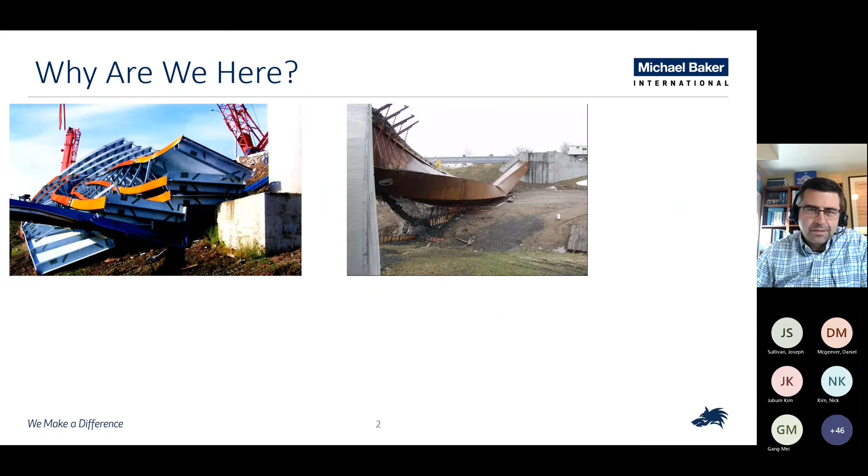One shown here - this was in Illinois. This one was up in New York State, a tub girder bridge while the deck was being poured. I'm not exactly sure where this one is, but it's not just a steel issue - it can also be a pre-stressed concrete issue if certain things aren't taken into account during construction. Those three photos are occurrences during construction where, unfortunately, in a couple of cases somebody lost their life. Obviously the superstructure was lost in that case too, and obviously these are all things we don't want to deal with. This last one, down on the right, is a collapse that occurred during demolition, which can also be a critical stage during the bridge's service life - taking a bridge out of service and removing pieces and parts of the bridge.

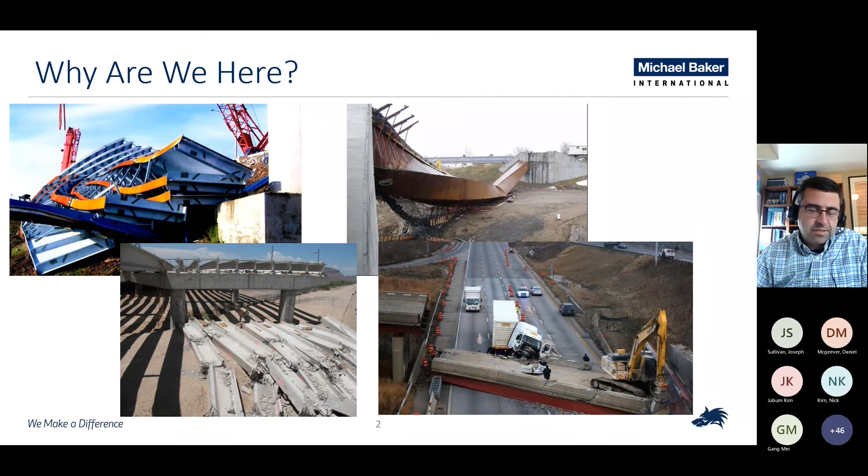These issues occur - not frequently, but every now and then. As engineers, typically we design the structure, put it on plans, and ship it off. It gets bid and built, right? But what goes into building that bridge? What are some things that, as design engineers, we need to be cognizant of as we review erection plans, erection calculations, contractor submittals, and things along those lines? So the goal here today is to run through this outline. I'm going to share some references and guidelines, and we'll talk about some critical stages of bridge construction.

Obviously, the bridge during construction is not the same bridge that we have as final design. In many cases, there's stability concerns during steel or pre-stressed concrete erection, during girder erection, that contractor engineers need to understand and take into account. Wind loading is a lot different from a structure that's not complete versus one that is.

Various non-composite conditions that occur, constructability, deck pours, things like that. We'll talk a little about stability considerations, going back to what the critical stages are and how we can investigate those as a construction engineer, or maybe what we should be looking for. And then also talk about what probably needs to show up on erection plans, procedures and calculations. Not every bridge fits into this. Some of your simple, maybe single span or short span bridges don't all fit into all of this. Some of them are a little easier to erect than others. Then we'll summarize everything up, and I'll touch on bridge demolition a little bit as well.

I think what I want to do is first start with some references and guidelines that are out there. I've been lucky enough to both be a part of the development of some of these, but also work as an engineer developing steel erection sequences and construction sequences for contractors. So I've got professional experience in that background, but also some experience helping in the development or review of some of these guidelines.

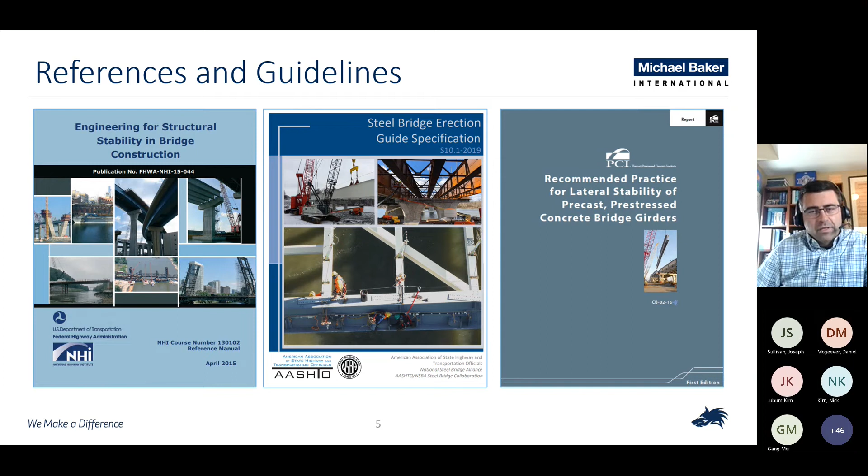The nice thing about all these documents is they're free. I think you might have to pay for the PCI one if you want a hard copy, unless you're a member, but the PDF is free, so you can join and download that. The other ones are free too. Again, the FHWA website, the AASHTO NSBA one is available at the NSBA website, and the PCI one is available at the PCI website. All really good references when dealing with construction engineering for all these bridge types.

I'm going to put a plug in here for this National Highway Institute course, the 130102, Engineering for Structural Stability in Bridge Construction. It's a 2.5-day course. You can find out more at the NHI website. Anybody can host it. Typically DOTs will host it and then allow some consultants to attend, but it's not out of the realm of having a consultant host it and having some of their friends come too. There is a cost associated with it, of course, and your own labor cost as well, but if you're involved in construction engineering, this is a must.

What you're going to see here today in the slides I share a little bit later are a few very quick excerpts from the course, just to kind of wet your whistle with regard to what's in the course, and then some other things from my personal experiences over time as well.

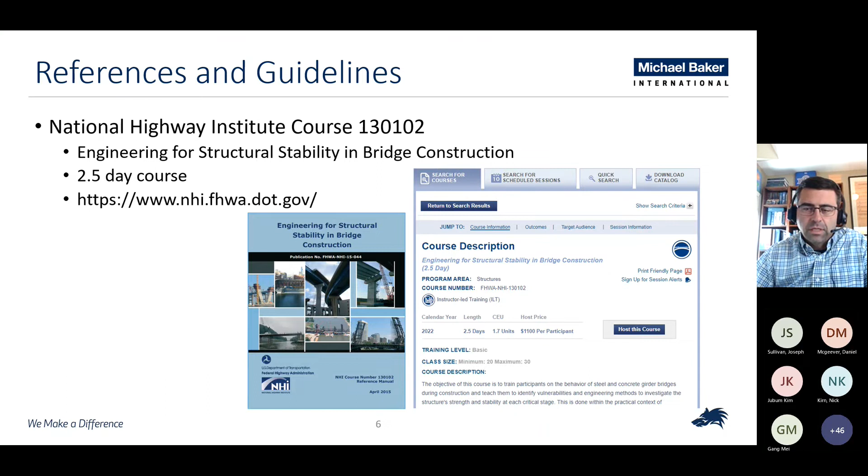So just keep that in mind. This is the 30,000 foot flyover of all of this. There's definitely a lot more that goes into the construction engineering for girder bridges. So let's just walk through some critical stages of bridge construction.

This is just a typical two-span bridge. This one's going to be steel, but it could be concrete as well. Obviously a little bit different if it's a pre-stressed bridge. But let's just walk through what occurs on a construction project like this, just a girder bridge.

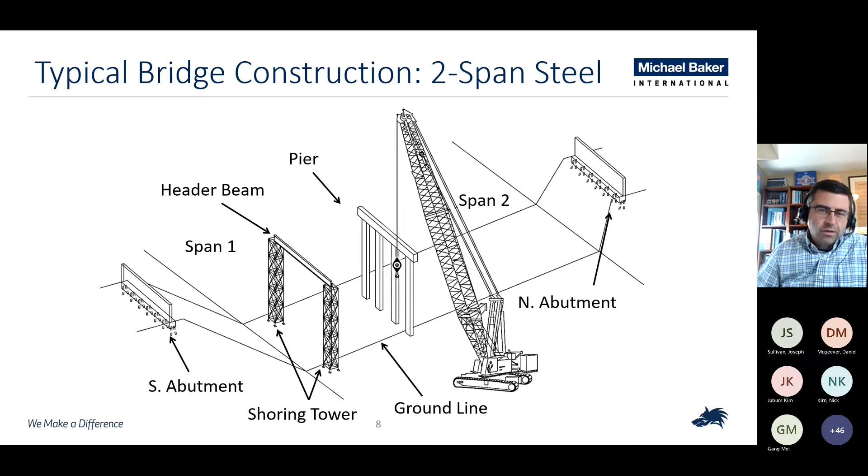We're going to have a two-span bridge. We're going to have the pier constructed, the abutments constructed, some kind of shoring tower in the middle, a lifting crane, the big crane shown there. And we'll go ahead and place that first girder.

Now there's some considerations that need to be taken into account with that first girder. If I just put it down without any bracing, if a little bit of wind comes, it's just going to blow the thing over, right? So we at least have to have some type of lateral bracing, temporary stability brace at the supports. You can see that identified there at the shoring tower, but then also back at the abutment as well.

What else do we need to worry about? Well, this is a very long unbraced length, right? So we have issues with lateral torsional buckling capacity. During construction, we often have long unbraced lengths that need to be considered.

But another component is also wind. I can't just put that girder down and hope for the best, right? There's going to be some kind of wind load that needs to be taken into account. Is it a 70-mile-an-hour wind? Is it a 30-mile-an-hour wind? Can the contractor only work when the winds are less than 20 miles an hour? Those are things we look at as a construction engineer.

An engineer working for a contractor will say there may be certain limitations with regard to that wind load when they can place girders, and that all needs to be considered and thought of by the engineer working for the contractor. So we'll move on.

We'll go ahead and put our second girder down. This particular one has cross frames on girder 2 on both sides. That'll often occur - they'll lift the second girder in with several of the cross frames attached. In some cases, it may be all the cross frames. In some cases, the contractor may choose, for the sake of speed and time, to not put in all the cross frames.

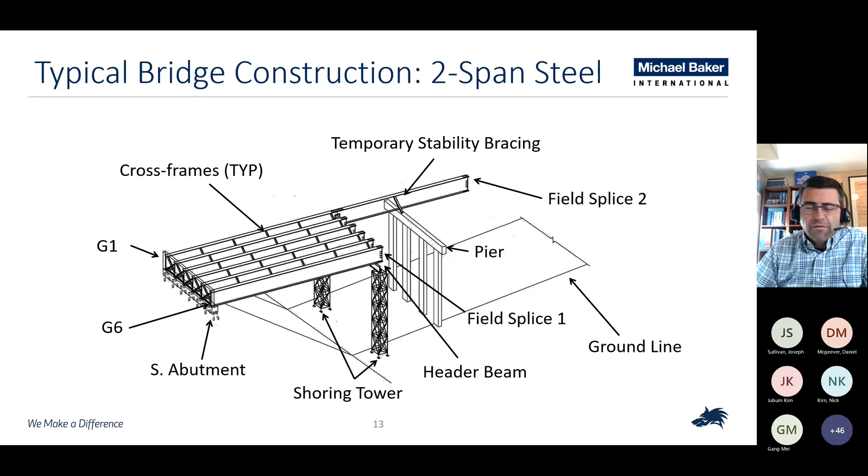Is it deflected downward too much where I won't be able to make the next field splice? Often it'll be okay for stability purposes, for stresses and things like that, but deflection control and consideration of deflection is always something to consider as well during erection, steel erection.

Then again, marching across the bridge, working our way across, erect all those girders, maybe all the cross frames, maybe not all the cross frames. This particular detail or sketch here shows all of the cross frames. So things to consider there again.

Again, we have to think about wind. It's not a completed structure, right? The wind is really blowing on one span with a little bit of a cantilever. So there's things to consider with regard to that.

One thing I'll mention here is often what I would see is some calculations show that all your wind is blowing laterally on the bridge. It's really just a collection of the IYs of the girders that are resisting that. Because you don't have any lateral bracing, top flange or bottom flange, there's really no AD squared term with regard to the stiffness of the whole entire cross section. So you're really just relying on the sum of the IYs to resist that wind load. Just keep that in mind when you're doing analyses for these, or you're checking these, or looking over some erection calculations, that it's really just the IYs.

Unless you have lateral bracing, then that changes the game a little bit. But we have to consider wind here, and it's not just necessarily for strength purposes, but also deflection purposes. We're going to have people out there working on the bridge. They may be setting rebar, perhaps, and if the bridge is deflecting 4 or 5 feet in one direction, which it can do if it's not stiff enough, we could have some issues with that. Some comfortability issues, as we'll say.

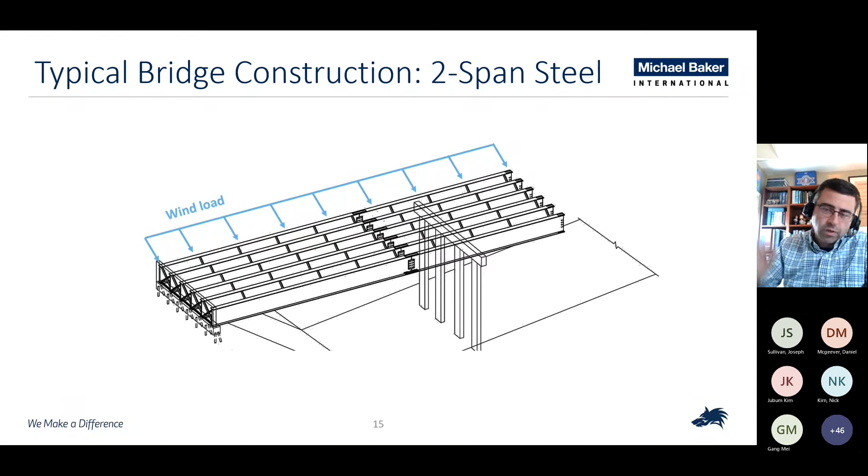We removed the shoring tower. I should go back here. Typically, you'll see that the shoring tower would get removed after those, when we're at this stage, actually. That is so that the field splice tips at the end there, they actually deflect upward, which makes the construction and the connection of this next piece much easier.

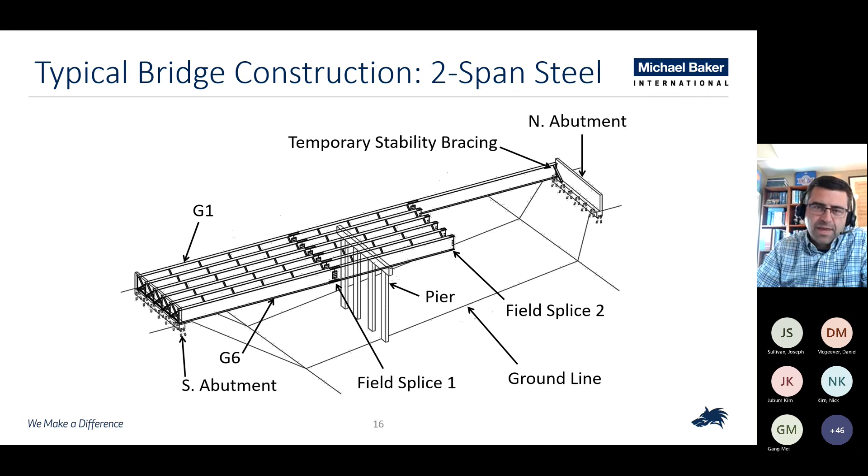You can think about bringing that girder piece in and connecting it to something that's pointed up as opposed to connected to something pointed down, especially when trying to set it on the north abutment. So often you'll see that shoring tower get removed once the span is done to kick those field splice locations upward.

And again, one thing we obviously have to consider here is again the wind loading on the completed steel framing. And again, like I said, it's a collection of the IYs, a summation of the IYs that are generally resisting that lateral deflection. And what can my bearings take? We always design for the final composite condition, but in some cases, again, the non-composite condition can control.

And maybe again, not so much for strength, but serviceability during construction, and the amount that those girders may move for wind load applications is something we do want to consider, and maybe not necessarily neglect when we're designing this. As a design engineer, we might want to look at wind on the completed steel superstructure just to make sure we feel good about it, and we're not going to have major fluctuations and deflections and things like that.

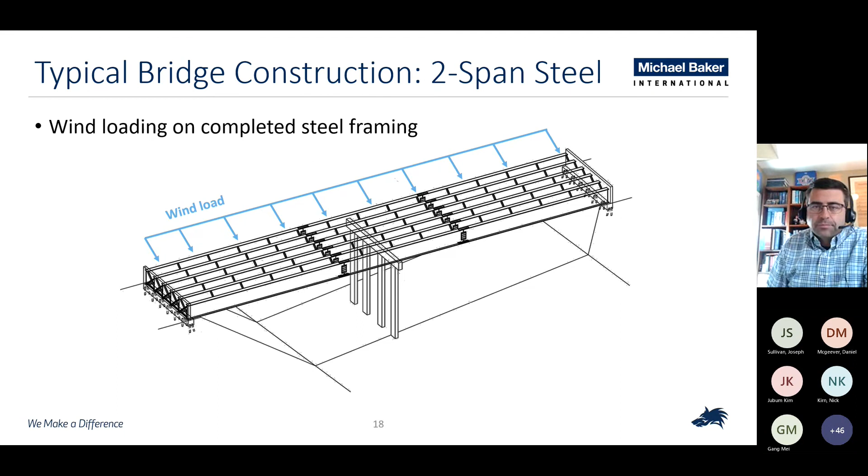Of course, once all the steel is up, my focus is going to be on steel for a lot of this. Once all the steel is up, we have to place the concrete deck, and there are certain things we need to consider. Generally these get considered as part of our constructability checks that we do as a designer, but the contractor often goes through these as well, just to get a better feel and make sure they're good with the deck pour sequence shown on the plans. As the contractor's engineer, sometimes I may have to look at this and make sure everything's good.

You could think about this: we're loading a lot of wet concrete on the bridge in the non-composite condition. So that changes the game a little bit. We've got this pretty heavy load, the concrete deck, going on just plain bare steel, and there are certain considerations for that. We're in a non-composite condition, and again we're concerned, in most cases, about the top flange in compression. Is that going to survive? Is it going to pass the lateral torsional buckling capacity checks, the lateral torsional buckling resistance checks we have in the AASHTO LRFD?

There's a whole section on constructability, and it really has to do with the deck pour. Loading the bridge in pieces and parts like this, with regard to the deck and the various staging, is often the most critical condition with regard to constructability. You really have to take a look at that deck pour sequence and make sure the girders will survive it, will pass muster, because the loading in this particular condition is quite different from just assuming a monolithic pour and putting all the self weight of the wet concrete on at once. So it's pretty important we look at the deck pour sequence, especially for longer span composite steel girder bridges.

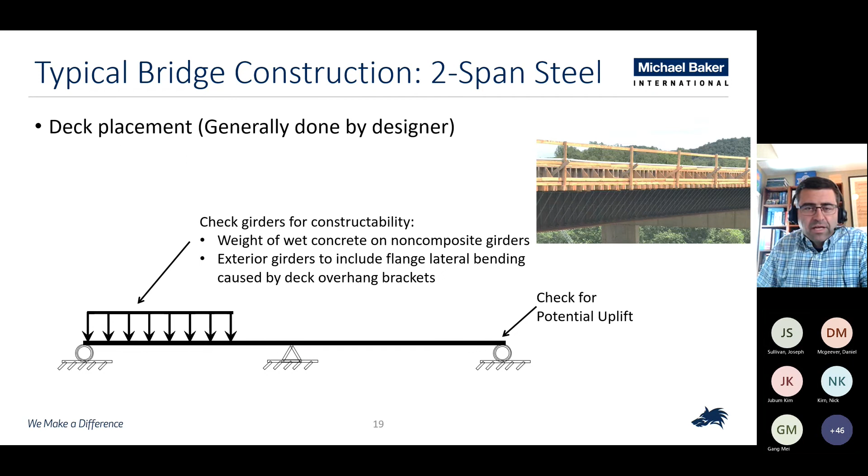In addition, for our exterior girders, we have to consider the flange lateral bending effects caused by the deck overhang brackets, and AASHTO LRFD addresses this as well. Those overhang brackets, as shown in the picture, we can make them out sitting on the exterior girder. We have to check those forces that get applied to the girder. We're going to have those overhang brackets spaced every 3 feet, maybe in some cases 4 feet. In some states, that overhang bracket also supports the Bidwell machine, or the screed, that places the deck.

We have the weight of the wet concrete out there on the overhang, the weight of the formwork, the weight of people out there, and of course the screed rail, if you're in one of the states that puts the screed rail out at the edge of the deck. All these play into the loading on that flange. And because that top flange is in compression, we have a lateral bending stress that gets added to it, with the one-third rule that's in the AASHTO LRFD. So it can add up.

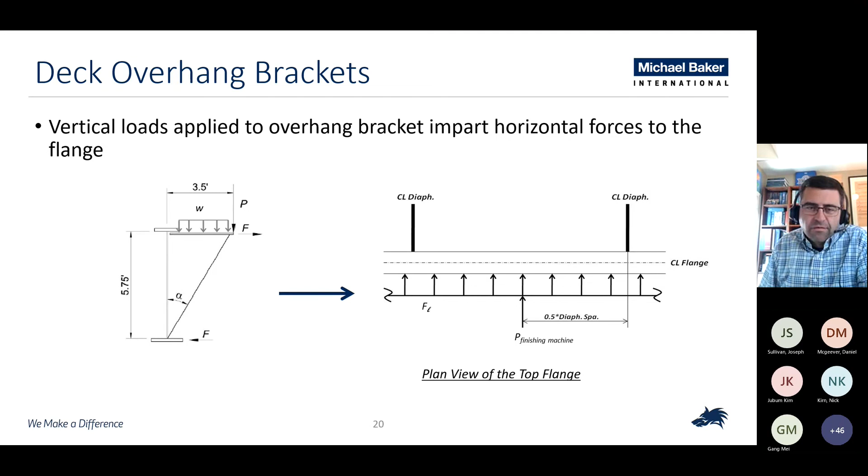Of course, narrow flanges are typically not good for this. Real small flanges, and typically in the positive moment region, we do have smaller flanges. If you get down real narrow, hey, it works great for strength. You may find it may not work so well for the constructability check. So just something to keep in mind going forward.

All of that I discussed before, we have all of that's in the non-composite conditions, right? So it's vastly different from when we just plug into our program that we might want to use and say, all right, run the live load on it. Let's see what happens. We always need to take that step back. If your particular program you're not using doesn't look at constructability, you really need to look at some checks outside of that program if you're using a program to design your girders for that. So just keep all of that in mind, the importance of looking at the deck pour sequence with that.

So let's talk about some stability considerations. In the previous couple slides, I talked about some conditions where we have concerns with unbraced lengths, typically for single girder stability of steel girders, two girder stability of steel girders, and then we'll talk a little bit about the pre-stressed concrete side and some things that we need to consider there as well. We could have similar issues, not necessarily with regard to lateral torsional buckling, but with regard to roll stability and lifting stability of those types of members.

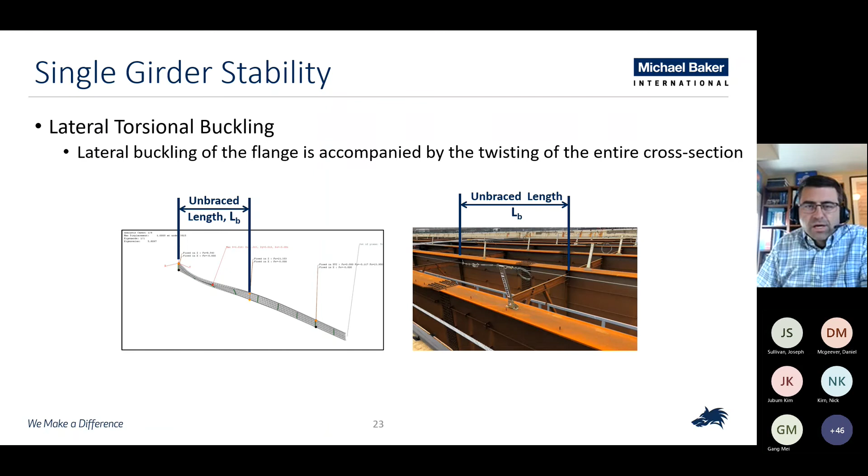So yeah, those are the concerns with regard to single girder. So what do we typically do? We're concerned about the lateral torsional buckling resistance of the girder. If you're familiar with the AASHTO LRFD, there's a nice section there on lateral torsional buckling, section 6.10.8.2.3, and we have three equations there.

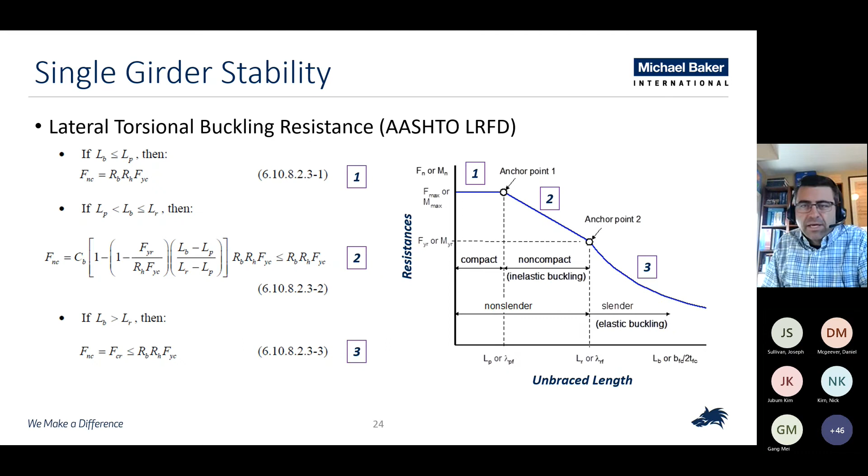So say I do have these long unbrace lengths. What can I do to make my girder work? I'm stuck at 125 feet or 100 feet. We can't put - we have to erect this first girder and that's that, right?

So maybe I use a hold crane to reduce the bending moment of the girder. Maybe I have a smaller crane on site that the contractor determines they're going to have there, and I'm going to hold the crane at midspan. I'm going to reduce the moment, right? Instead of a nice, big moment diagram, I'm going to put a point right in the middle and pull the girder up a little bit, so my moments are significantly reduced.

The big thing there: the hold crane cannot be considered a brace point. That's something to keep in mind. There's not enough lateral stiffness typically with that crane holding it there that you can consider that a brace point. So it's probably a wise decision to not consider it a brace point.

Second thing you could do is provide a brace point at the midspan, maybe with some tie downs. Maybe you've seen this before - cables wrapped around the girder down to a concrete deadman or a big concrete block on the ground, both directions on both flanges, just to brace the girder. Those would be attached before the lifting crane releases the girder. That would provide - you'd have to do some design calculations - but assuming your calculations are correct, that could be used to provide a brace point at the midspan and reduce your unbrace length, cut it in half. Or maybe you can just provide more temporary support, a different shoring tower arrangement, and then put that lateral brace down to that shoring tower.

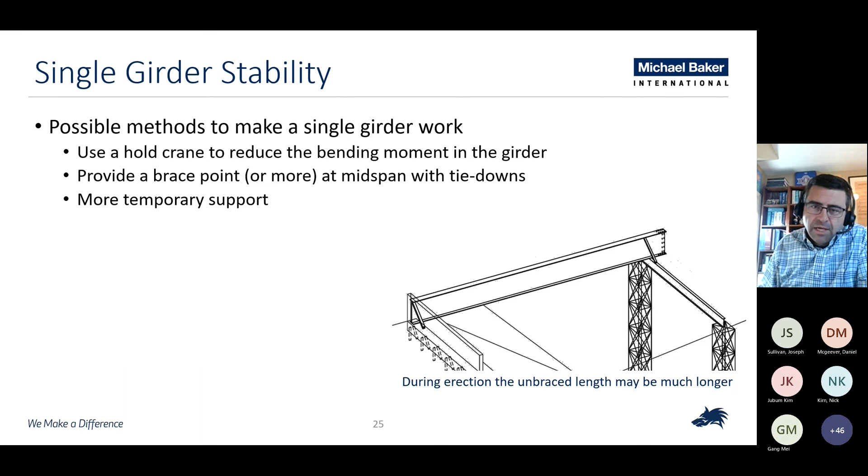Again, long unbrace lengths affect the lateral-torsional buckling resistance. Don't just walk away once you get the second girder up - you've got to check that. Maybe you're only going to have one cross frame at midspan; you need to make sure that works in this particular case as well. Maybe the contractor wants to come in and just put in one cross frame initially and then come back and put all the rest later. So you have to look for these long unbrace lengths, not just for vertical load, self weight, but some considerations with regard to wind as well.

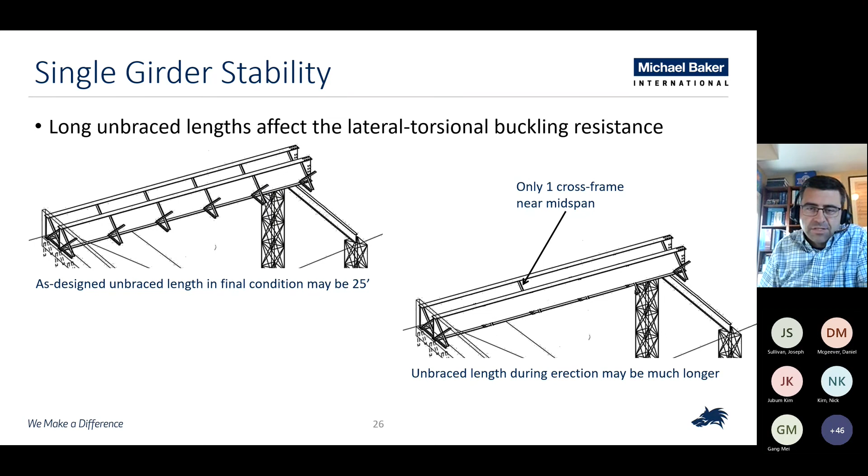So let's move on to two girder stability. There are some conditions where you do have two girders erected, like in that previous slide, where I might have some issues with regard to stability of narrow units. The designer typically uses the unbrace length LB for girder buckling - that's the distance between cross frames. But we've seen girder systems as a whole, a long and narrow girder system, so a long length to width ratio, become susceptible to a system mode of buckling or a global stability mode of buckling.

In this particular case, you could put all the cross frames in you want, and they're really not going to affect the behavior of the bridge in the system mode of buckling.

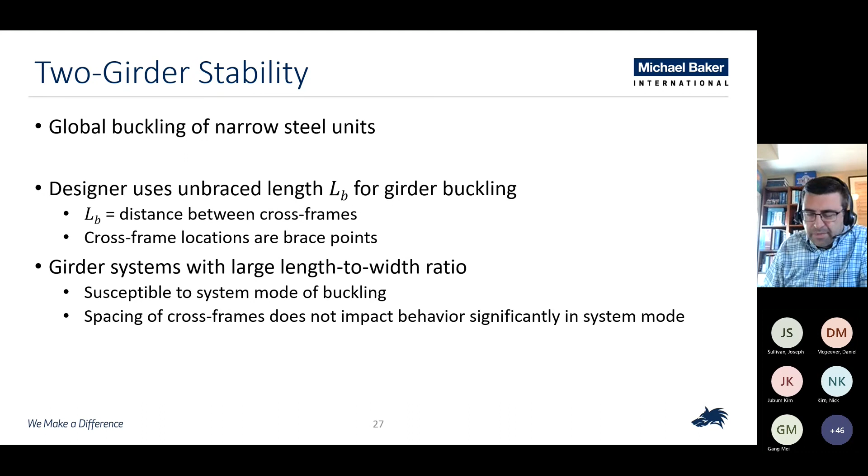This really came to light in 2002, and I shared this picture before. This is the Marcy, New York pedestrian bridge. It consisted of a single box girder with no top lateral truss system, so no lateral bracing in the plane of the top flanges. The girder did have internal K-frames spaced a little more closely than normal.

But research from the University of Texas at Austin, by Joe Yura and Todd Helwig, looked at this pretty extensively over time. What they found is that this particular girder really behaves similar to a twin I-girder system with no lateral bracing in between. It really started some concerns with regard to structures like this.

What occurred here in the Marcy Bridge is they got the steel up, no problem, got the rebar laid down for the deck, and started pouring the deck. Once they started pouring and got maybe a third of the way out, the girder twisted globally and unfortunately fell down. I believe at least one of the workers died on the job there.

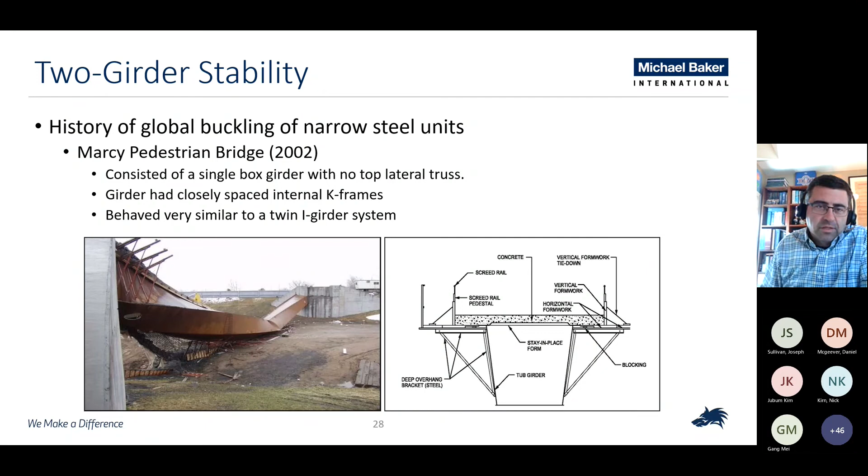So what was found is the cross section wasn't offering enough global stability at the end of the day. A lot of investigation went into this.

You can think about this for a two girder system, your LB, your unbraced length between cross frames, versus LG, basically the length of the global system. You have buckling in two different modes here: one is lateral torsional buckling between the cross frames, and the other is global buckling for the entire bridge.

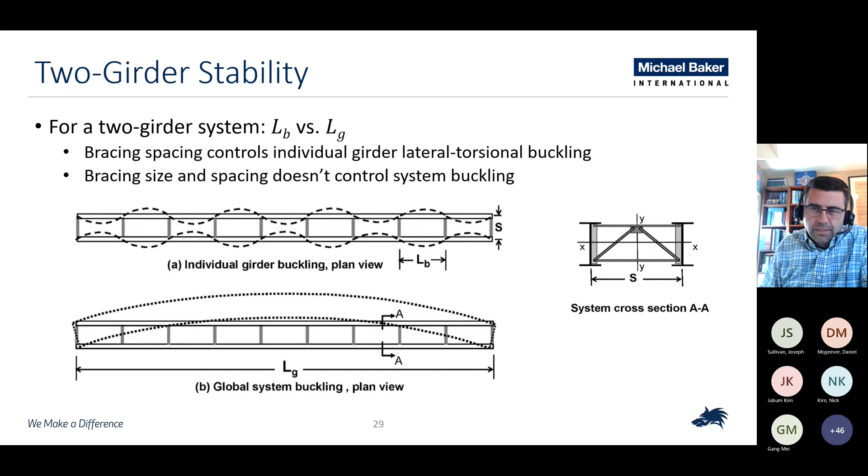Some studies done at UT Austin put the same bridge in there with the same girders and the same cross frames. You can see on the left, the global buckling critical moment is roughly 800 kip-foot. On the right, the buckling between cross frames is close to 1400 kip-foot. So almost half.

So something to consider if you have a two girder system, a long two girder system that you're putting a deck on for some reason, maybe even some three girder systems as well.

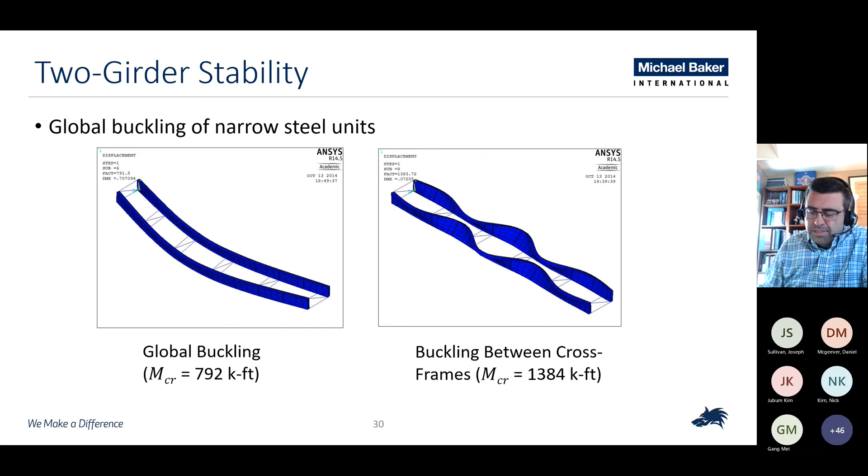This gets talked about in the AASHTO LRFD equation 6.10.3.4.2-1. This whole section talks about the global buckling of narrow systems, and a lot of this equation was developed through the research work based on the Marcy Bridge collapse at UT Austin.

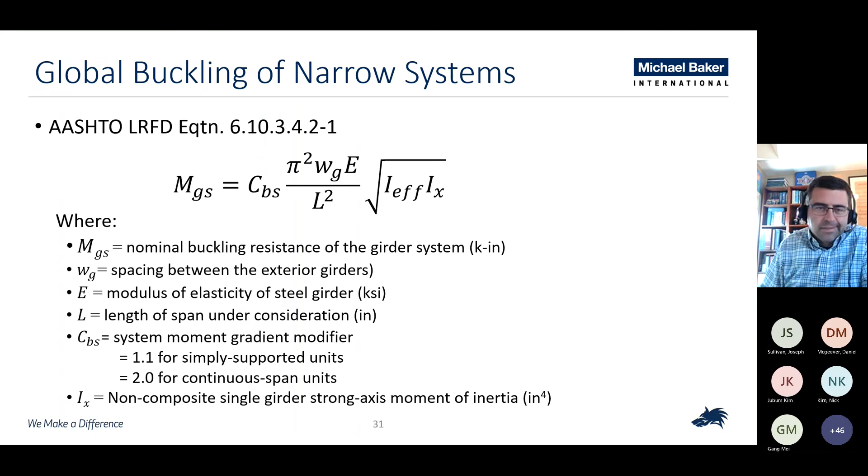I'm not going to run through all the things here, but it's just some general parameters you can easily come up with based on your girder design and cross section design. You can see CBS there is either 1.1 or 2.0, depending on whether you're simply supported or continuous spans. I effective really comes down to your effective IY basically at the end of the day—you've got your IY on the compression flange and your IY on the tension flange, and that's really a combination of those two, and just where the centroid lies within the girder.

There's a statement in there for non-prismatic girder properties. AASHTO recommends doing some kind of weighted average for IX and I effective, so you're not looking at each individual location along the girder—you make some engineering judgments with regard to that. A weighted average is fine. A lot of this is already approximate, so being a little more approximate is not going to change anything.

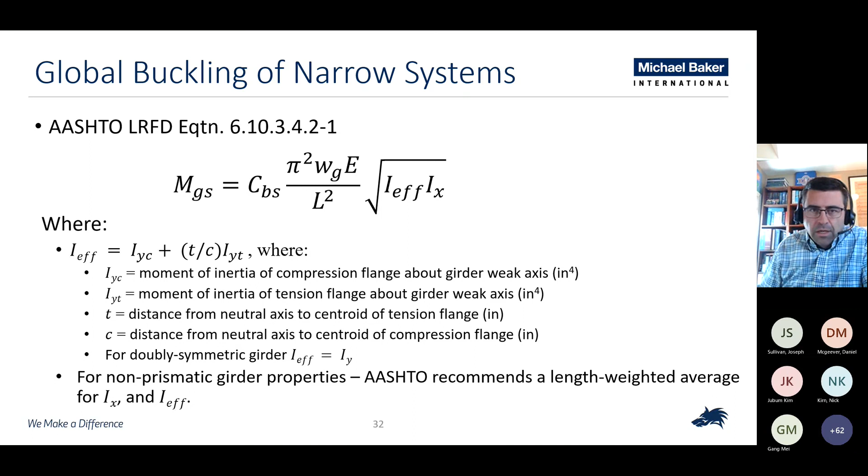So you calculate that global stability moment, and really what AASHTO says to do is you're considering all the girders across the width of the unit and the span. You're going to take your total factored moment for the deck placement, and it shouldn't exceed 70% of that MGS, the global stability moment.

And really that's a big thing for pouring decks on long narrow systems—big length to width ratios. Think a long 200, maybe 300 foot span that maybe only has 4 or 5 girders. This really starts to play a role regardless of how many girders you have in the cross section.

So what happens if you don't meet that? What happens if your moment for your deck pour is greater than 70% of the MGS? Well, you may want to start considering adding flange level lateral bracing, typically in the top flange, or you could try to revise the unit system stiffness.

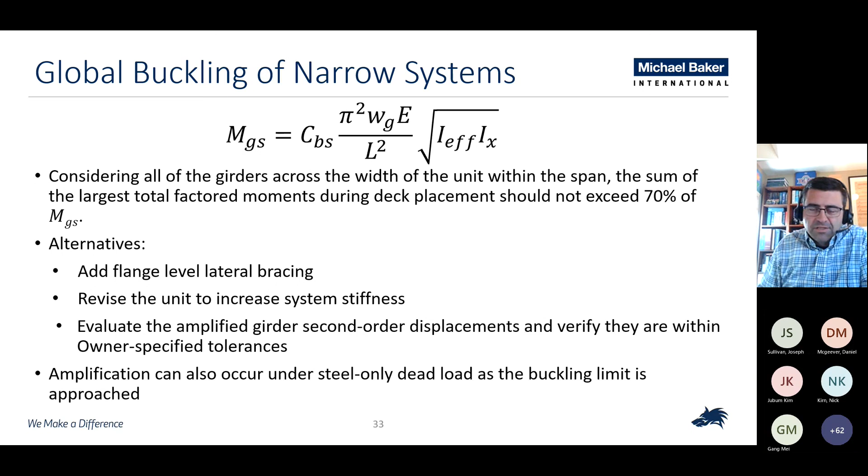Maybe you do a higher end analysis and look at the amplified girder second order displacements and verify they're within some tolerance. You can look at the buckling, do an eigenvalue buckling analysis and get into all that. But generally, this equation is going to serve you well in those types of conditions.

So just an example here. Don't necessarily get caught up in the numbers, but really want to show here's this two girder unit. We have a simple span, a length of 180 feet, and we're going to do a couple different things here with it.

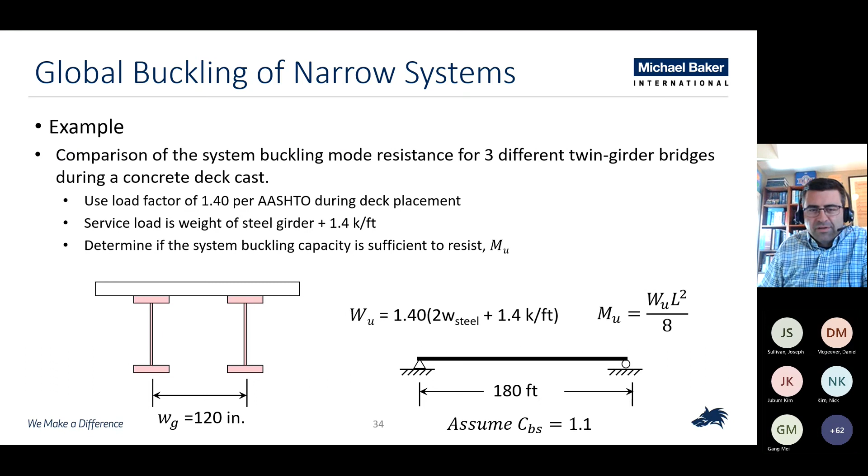Again, we're going to look at bridge 1 and 2. They have no lateral bracing, 180 feet. Bridge 3 has some lateral bracing just in the last 2 bays on each side. So our effective LG in that case is only 1,200 inches as opposed to 2,160 inches, and everything's converted to inches here. So you can think of it as we've narrowed down that global unbraced length, or that global length with regard to stability that we're concerned about.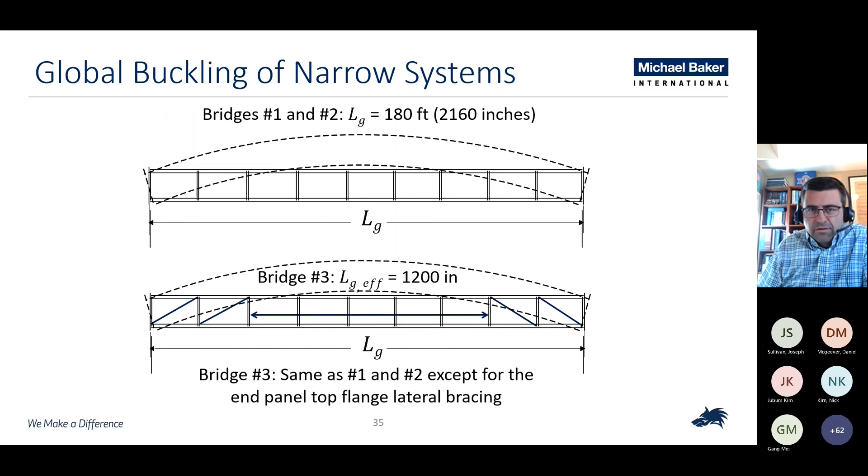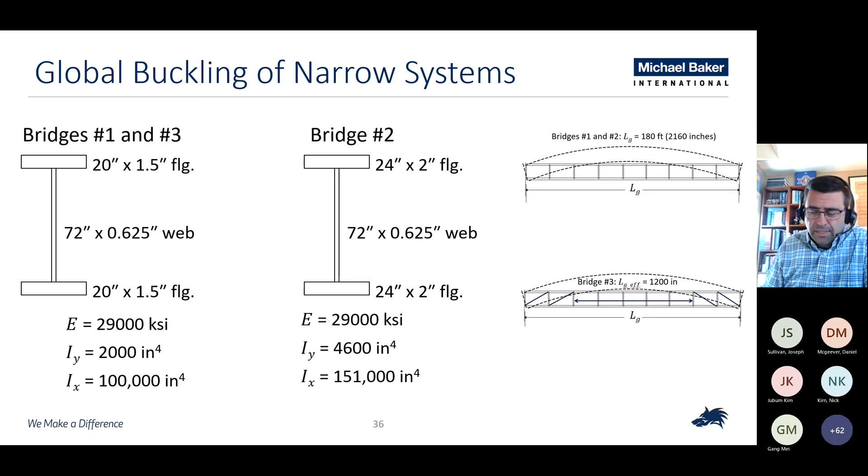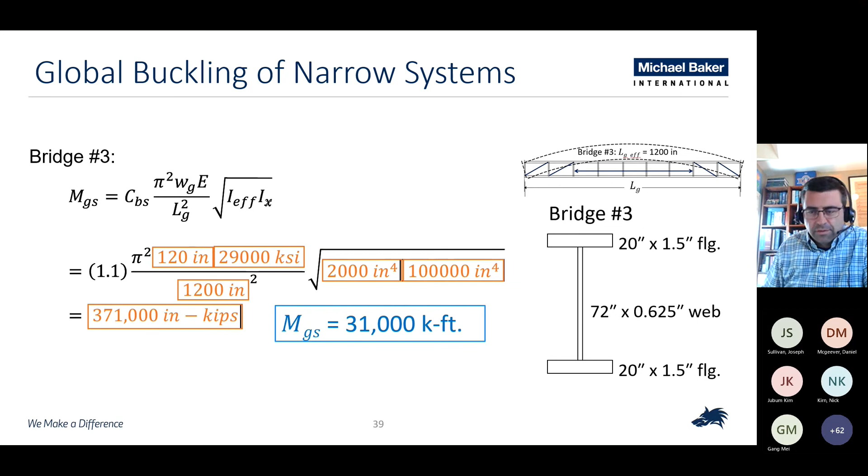So you could run through these calculations. I'm not going to run through them all here, it's math, it's kind of plugging things in. But you can walk through bridge 1, we get an MGS of about 10,000 kip foot. Bridge 2, I'm going to have a slide that compares all these in a second, 17,000. Bridge 3, where we have that shorter effective length for global stability, we're up to 31,000. So let's put all these on one slide and multiply them by 0.7.

So you can see, bridge 1, again I have that one girder section, the same girder section as bridge 3, I have roughly 7,000 kip foot, and we had a global moment of 8,600 kip foot. Does it pass? No. That's the MU there. Well, really what I want you to focus on is how the capacity or the resistance changes in this particular case.

So bridge 1, again, no lateral bracing, the smaller flanges. So let's say we go from bridge 1 to bridge 2, same framing plan. We made the stiffness a little bit bigger, we made our IY more than double, we increased our IX by 50%, but not a whole lot of gain on the capacity or on the resistance for global stability. We went from 7,000 to 12,000. Some gain, it does work, but we got a pretty big section there. Maybe we can't get that section to work for some other reason.

Bridge 3, compare that to bridge 1. There we just added in some top flange lateral bracing in the two end bays. You can see the gain we got in our global stability moment, we're up to 21,000 as opposed to 7,000. So throwing in a little bit of lateral bracing, just in the end bays, the two end bays on each side, helps tremendously with regard to that global stability.

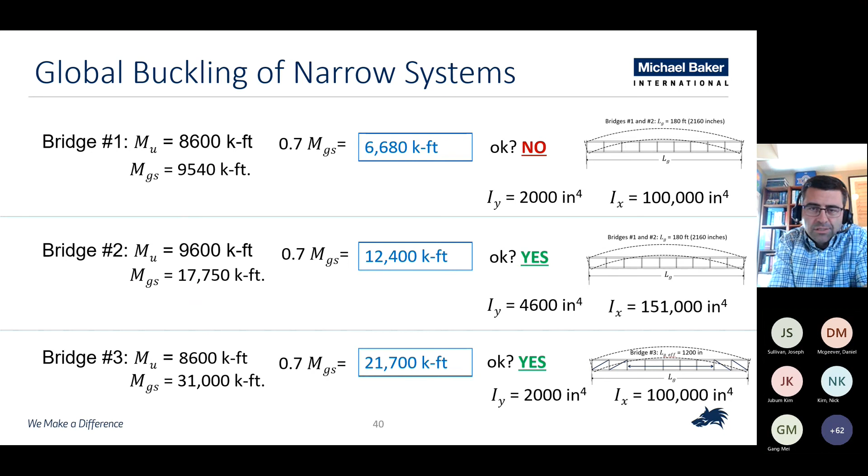So if you're in a design and you're having issues in this regard, you really want to start considering lateral bracing, especially spans greater than 250 feet. Really take a look at this, and you don't need it full length. A couple of bays at each support, either direction, should suffice, and you can run through these calculations and see that.

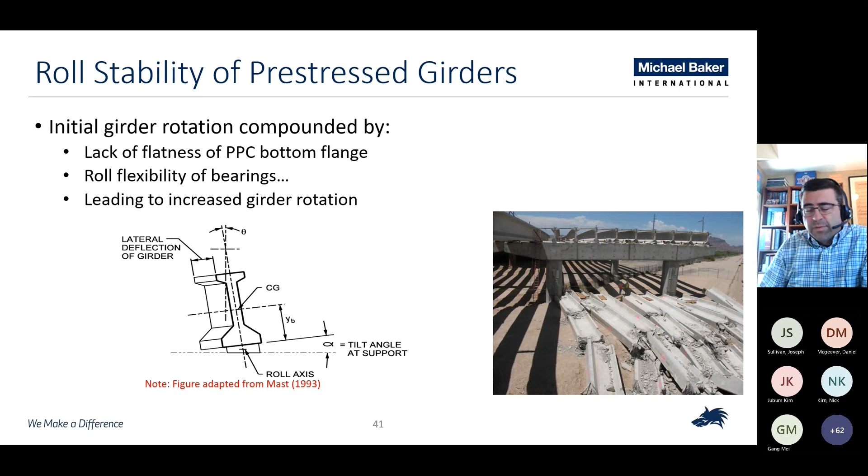Not to be left out, we do have some issues with regard to prestressed girders during construction, and it really amounts to the roll stability of these. Initial girder rotation gets compounded by maybe some lack of flatness on the bottom flange of the beam. The bearings are a little bit more flexible for these, a lot of times we're putting these on elastomeric bearings. So if you get a little out of plumbness of the beam, maybe you get a little more roll on the elastomeric bearings. It kind of all adds up, leading to some increased girder rotation at the end of the day, and in some cases, maybe too much, and we end up with a condition kind of shown over there on the right.

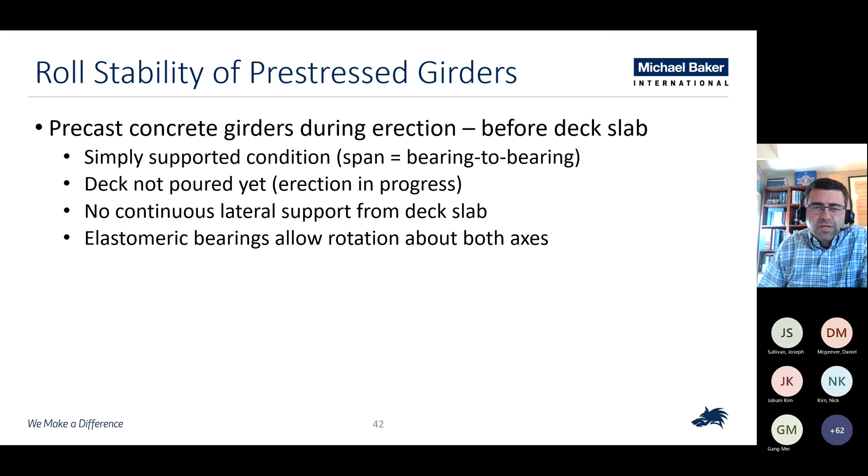Precast girders, during erection before the deck slab, again, they're vulnerable, just like steel I-girders, but maybe a little different. In some cases we have simply supported conditions that we're making continuous for live load, but the deck isn't poured yet. We don't have any composite action going on relying on that deck, nor do we have the continuous lateral support in the lateral direction that the deck slab provides. As I said, the elastomeric bearings do allow some rotation about both axes.

The influence on roll stability, what are some influencers? Again, the bearing slope - maybe you're on a curve for some reason, and you have some kind of sole plates that may be beveled or something acting against you in this particular case. Bearing skew can play an effect. And of course, there's always going to be girder imperfections, no matter what kind of girder we have, and that'll play a role.

The rollover controls stability - it's not a lateral torsional buckling mode like on steel girders. The flanges are so big on a pre-stressed beam. We want to make sure they're not going to crack under self weight, and that could lead to issues.

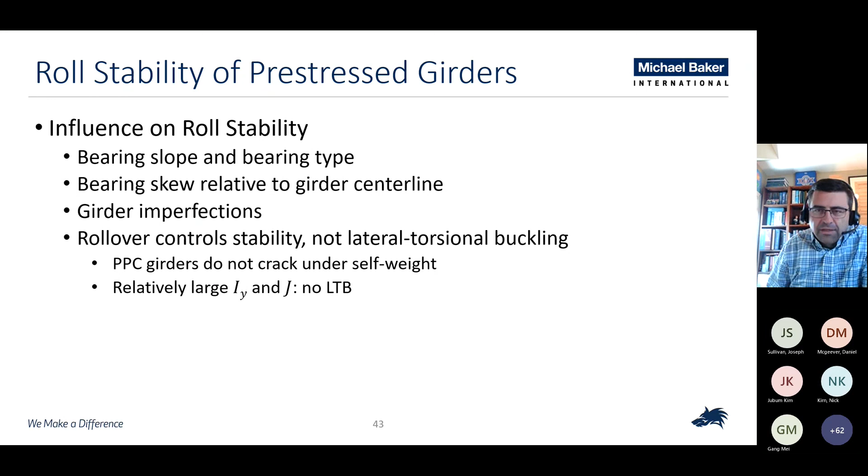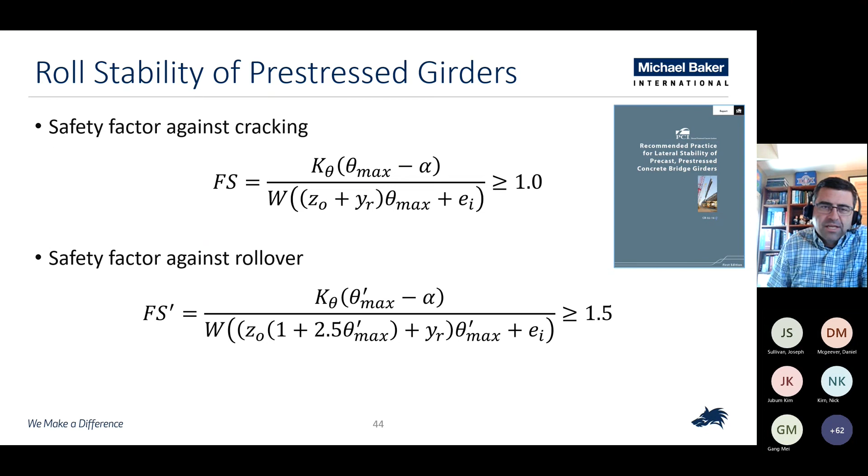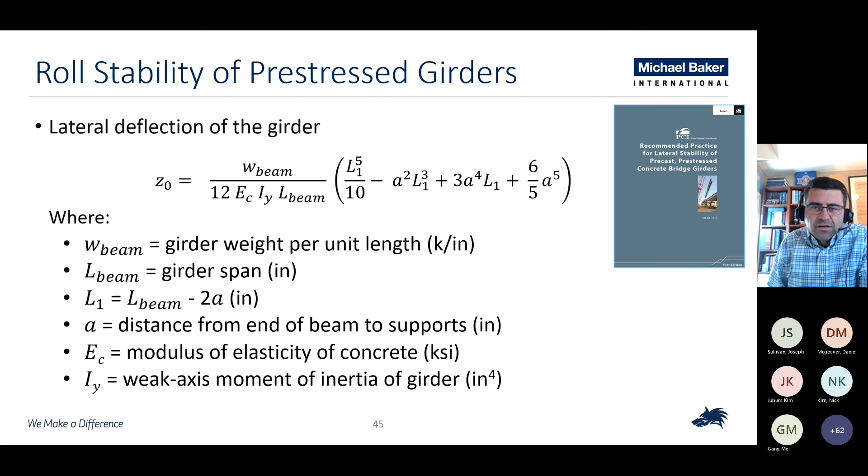Factors of safety - the safety factor you want to compute against rollover during construction. But then also we want to check the lateral deflection of the girder and make sure we're okay with that, and that feeds into some of these equations as well. You can see the Z0 terms down in the bottom, in the denominator, and that's where this comes from. So it's a lot of math, some big ugly equations that are easily programmable into a spreadsheet, but it's all laid out here on the checks we want to do to make sure we don't have any issues with the pre-stress girder.

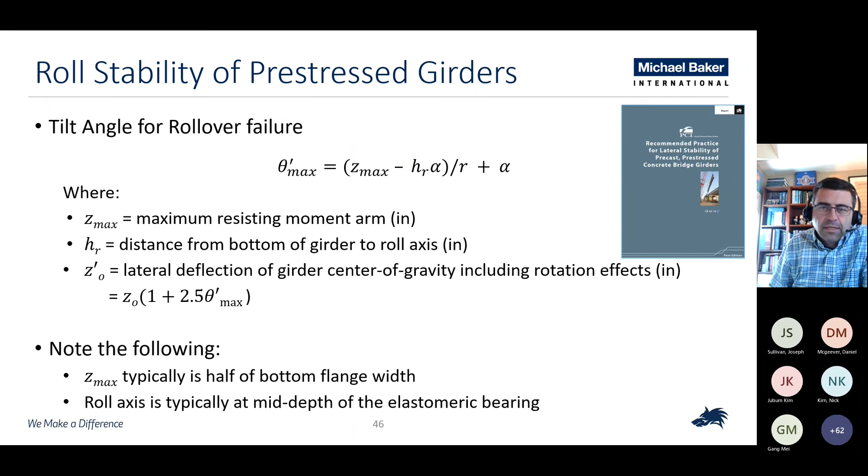Again, the tilt angle as well - another calculation. Everything's given, based on parameters that you've already designed for or already have from your design. So it's just a lot of usage of those parameters in various equations. Again, if you're doing construction engineering with pre-stressed girders, you really need to take a look at the PCI guideline for lateral stability.

What are some methods to avoid stability issues? Well, again, pretty similar in some cases to steel I-girders. Maybe you want to increase the bottom flange width, the bearing pad width - you don't want a real small bearing on a really big girder. You really want to brace the girders at the supports during erection. That may help out a lot.

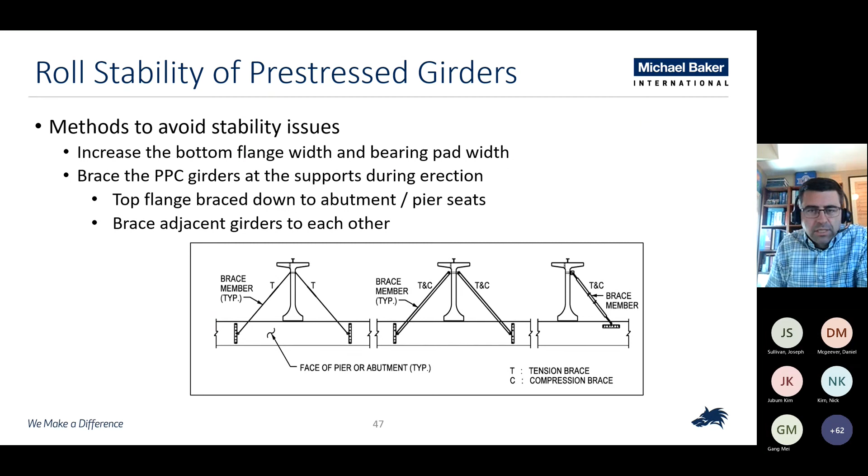The top flange brace down to the abutment and the pier seats, brace the girders to each other. Some configuration shown here, using the face of the pier, the face of the abutment, and having some solid bracing members to provide the necessary stability that you need. Maybe it's from one side, maybe both sides. Maybe you're tensioning them down, maybe there's tension and compression in these members. So things that we need to think through.

So let's briefly talk about bridge erection plans and procedures, and touch on some bridge demo things as well. The erection plans and procedures - the general objectives really need to convey the means and methods of the particular erection sequence to the field staff. This is how the field staff out in the field is going to build the bridge. There's always logistical issues, multiple subcontractors working on a site, so the sequencing and coordination is critical, making sure certain trades don't conflict with each other. I can get girders in at a certain time, get them erected at a certain time.

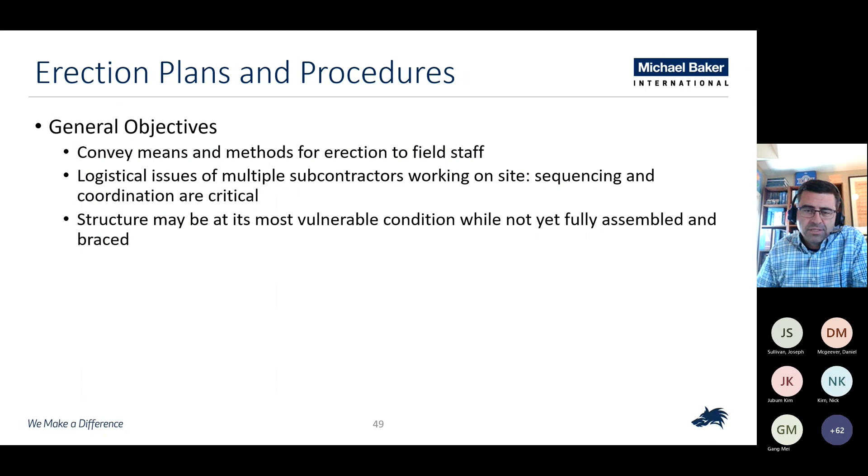And really, the structure can be, and often is, most vulnerable because it's not yet fully assembled and braced. We're lifting girders, putting them down on long supports, far apart from each other, without any bracing. As we talked about before with my first few slides, those are some vulnerable conditions that we really need to take into account. The erection plans and procedures should include step-by-step methods on how to go about and build things.

There really needs to be some calculations that support them as well. At a minimum, the plans need to show a sketch of the work area, some site logistics. Maybe there's a river in the way, or a feature being crossed, a highway, something else. The sequence of erection - do I start from one abutment to the other, or go from one direction to the other? Pick weights are often useful. Make sure that. Often you'll see some crane charts provided in there as well, and often much more with regard to that.

And of course, as I said before, there needs to be some calculations prepared by the contractor, by the engineer working for the contractor, that support all of this too. It just can't be willy-nilly, just how we're going to build the bridge.

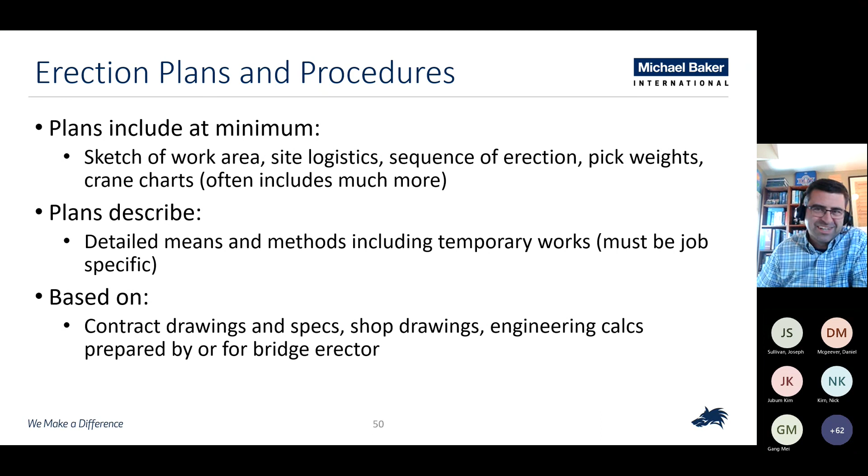Where can you find guidance on erection plan submittals? Again, maybe Pennsylvania, of course, may have some state-specific or owner-specified submittal guidelines, maybe some specific contract documents as well. There's the AASHTO and NSBA Steel Bridge Collaboration's Steel Bridge Erection Guide Specs. Appendix B of NCHRP Report 725 really led to a lot of what's in that guide specification from AASHTO and NSBA, but there's far more detail in there. There's some really good recommendations in the reference manual for the NHI course as well that I talked about before.

The course 130-102 has really good details with regard to what you should be looking for as an engineer working for a contractor, and then maybe on the review side as well, if those erection plans are submitted for review. And then, of course, if we're working over railroads, they may have some requirements as well, adjacent facilities. But really, what goes into it?

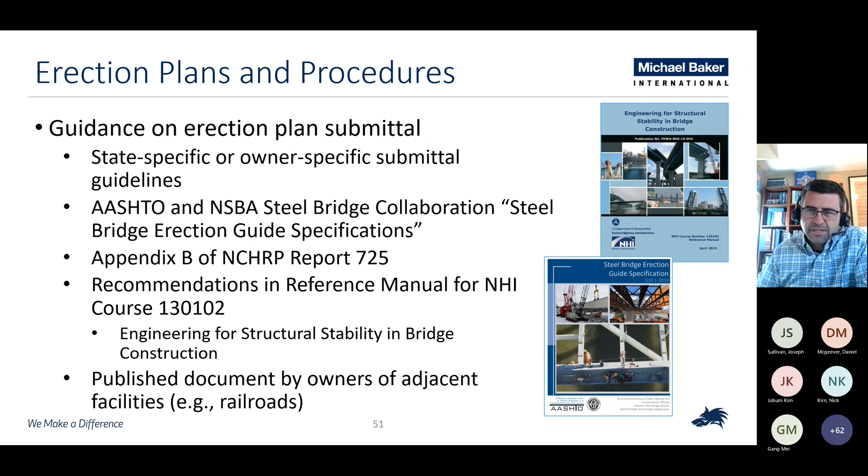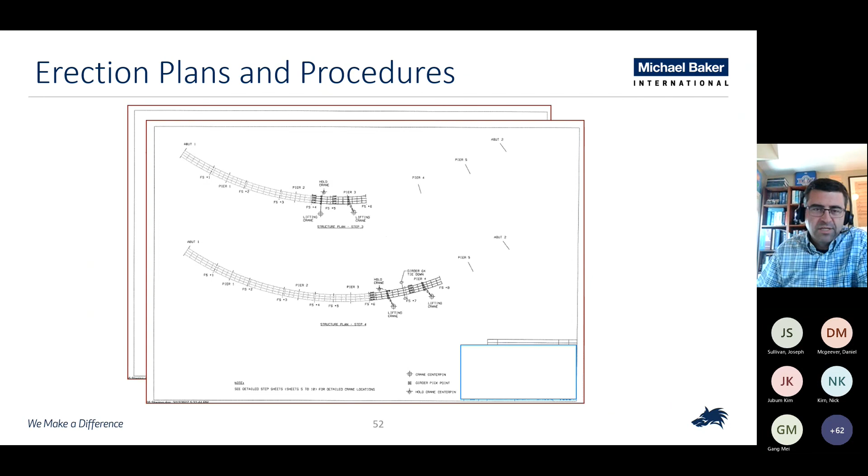Well, what I'm going to share here is an erection plan for a curved girder bridge that I've worked on before. Generally, you're going to start off with just showing, step by step, an overview of each stage of construction, and you can walk through it here. As you march along the length of the bridge, we're going to erect these girder segments, these cross frames, with these cranes. You're going to have some lifting cranes there, some holding cranes there. Where, in the ballpark, do I need to position the lifting crane? Just an overall schematic of the whole procedure while building that bridge.

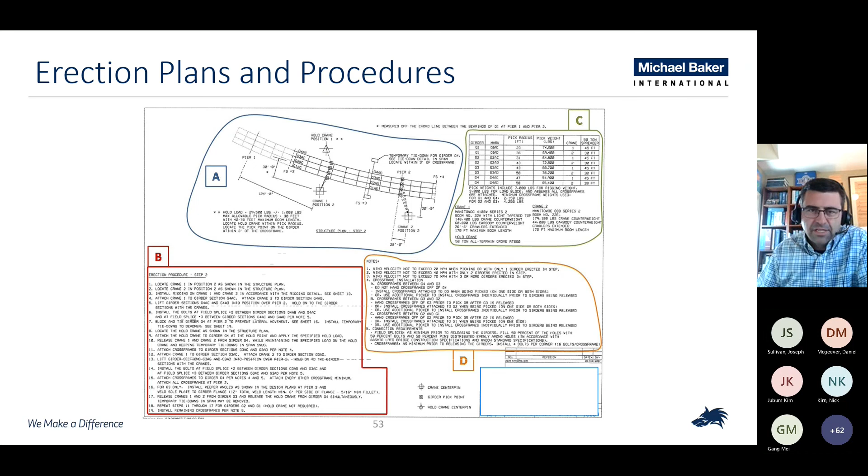But then you're going to have some detail sheets, or you should have some detail sheets, that go down to the nitty gritty of each stage, right? And I have four boxes, kind of highlighted here, that have the different various items that really need to be shown, or should be shown, especially on a curved girder bridge project, a curved steel girder bridge project.

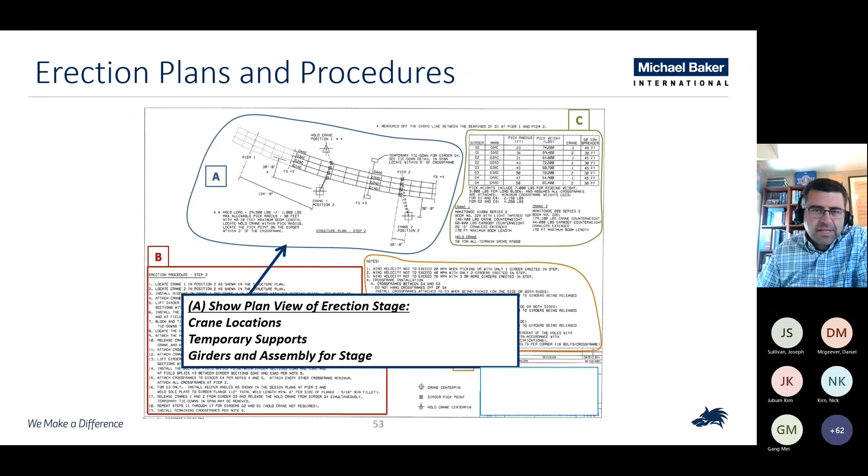You want to show a plan view of the erection stage. Where are the crane locations? Where are the temporary supports? Where are the girders and assembly for each stage? What girders and pieces and parts make up that assembly? Is it all the cross frames? In this particular case, we erected all the cross frames as we marched along the length of the bridge, so that's why they're all shown. Okay, maybe you're skipping a bunch of cross frames, and that would be shown here. So, laid out schematically, typically in plan view, showing all those things.

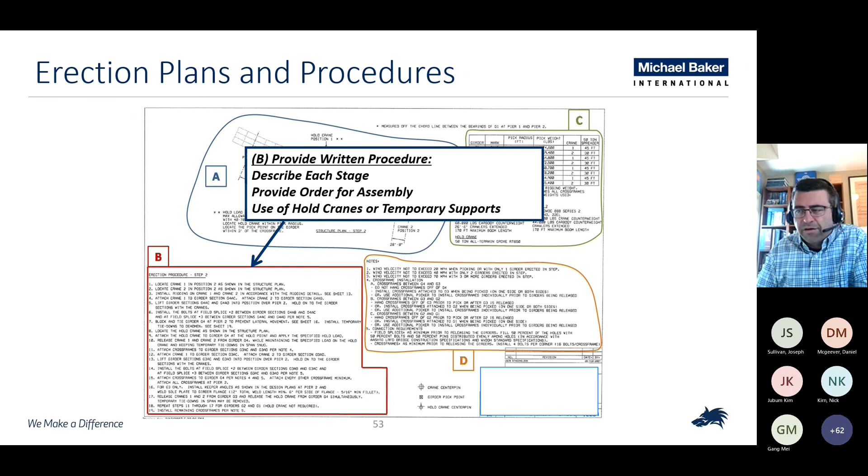There should be a written procedure, almost like the instructions to building an IKEA dresser, we'll say, right? Just describe each stage, word by word, enough information there. Provide the order - am I going inside girder to outside girder, girder 1 to girder 4? When am I using a holding crane? When can I let that holding crane go? When am I using temporary supports? How many bolts do I have to put in the field splice? Typically, we're going to put bolts and pins up to 50% of the holes. Maybe there's something else going on where we're having a limited amount. Again, all of that needs to be identified within that written procedure, or should be identified in that written procedure.

I'm also going to show crane information. Contractors and engineers shouldn't work in a closed box. There really should be communicating a lot with the contractor with regard to what kind of cranes they're going to be using on the job site, what cranes they plan on using, and maybe some alternatives. What are the types? What are the lifting beams in this particular case that are going to be used? And then a table of pick weights, particular crane radii that are permissible, and the crane capacities.

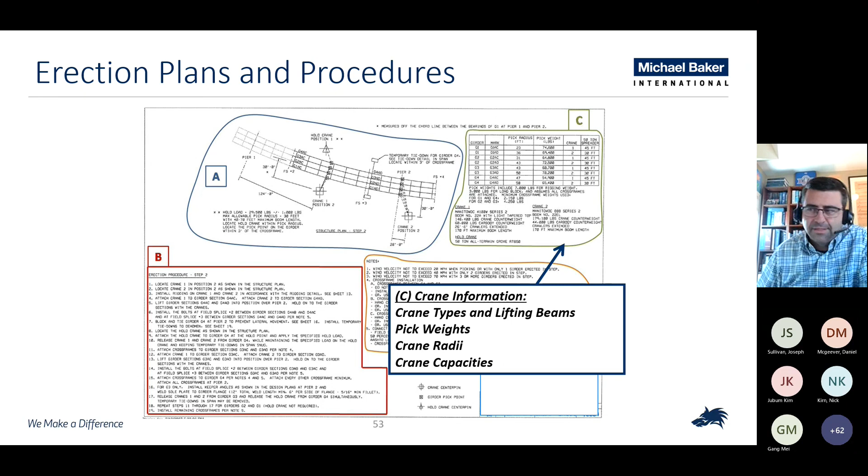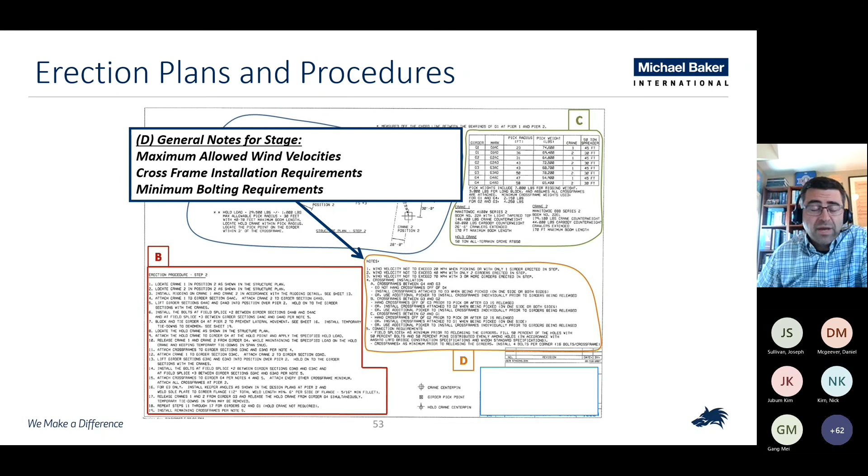And then general notes for the stage. You heard me talk about before, maybe there's some wind velocity considerations. Maybe I can only have wind at a certain speed for various stages of construction. Cross-frame bolt installation or even cross-frame installation requirements need to be provided, and the minimum bolting requirements as well. Maybe I'm not going to put in all the bolts on each cross-frame. Maybe I'm only going to put in 50%. Maybe I have to put in 75% for some reason. So keep that in mind, and that's really what should be shown.

And then other details, right? Specific details. In this particular case, we had a hold down at the temporary support. We utilized one single temporary support tower under one girder, and we braced that girder up at the top. You can kind of see the tie downs shown there. And then on another sheet, which I don't have here, it kind of shows those anchorages, those ties coming down to the concrete deadman, the concrete blocks on the ground to provide that brace point. There are certain calculations that have to go into making sure that's a sufficient brace point.

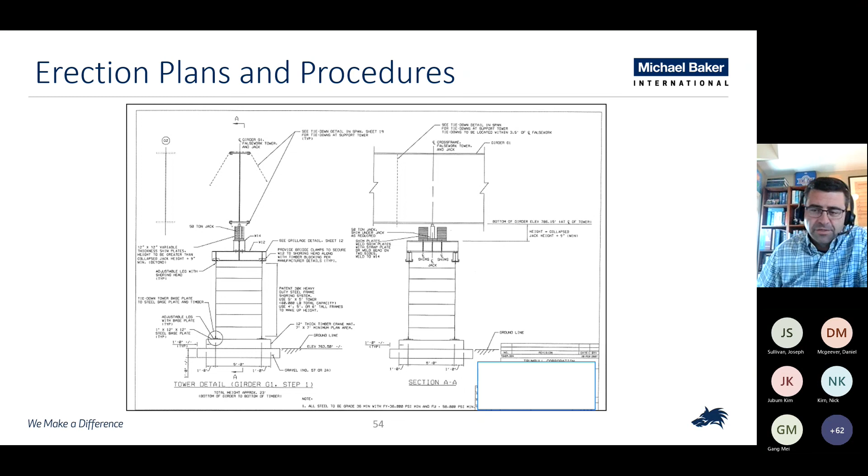As I said, there should be calculations that support that erection plan. A lot of things shown here. The calculations need to address all the critical stages, verify the structural capacity and stability of the girders at each stage, take a look at wind loads, take a look at all the various loadings that may occur, look at member deformations. That's really more so helping out your contractor, making sure I don't have conditions where the girders are maybe sagging down at the field splice tips and making connection with the next piece virtually impossible. I'm not going to walk through all of these, but they're all discussed in great detail in the guide specification from the AASHTO NSBA S10, and then also in the NHI course as well.

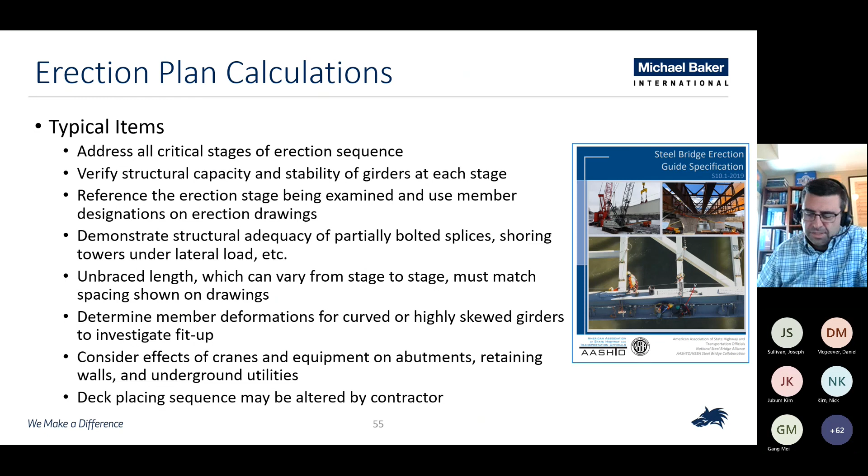I did want to spend a minute or two on deck slab removal. Demolition can be a pretty critical item when taking apart a bridge, taking a bridge out of service. Why is that? Well, we're often loading the bridge with some kind of excavator, some kind of device to remove the concrete slabs. We're saw cutting the slabs. We have a non-composite condition for some of the girders while backing that concrete deck off.

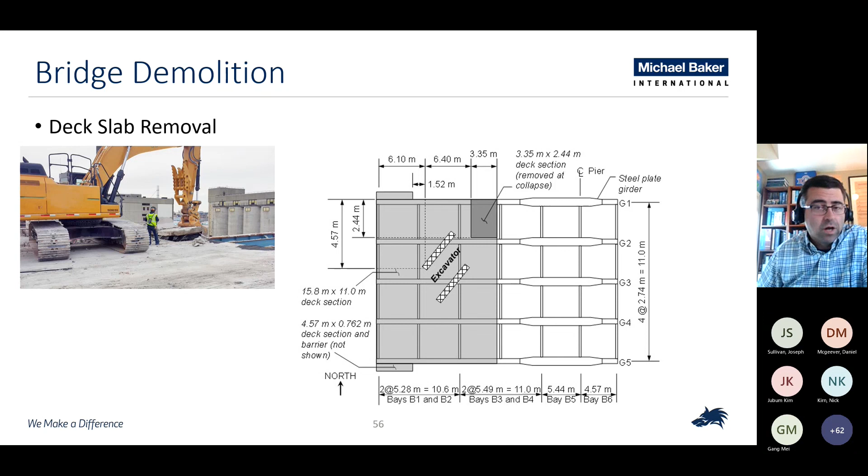So we have a different loading on -- while the loading may be almost the same as an HL93, in some cases it will be more. These excavators weigh a lot more in some cases. We have some non-composite conditions on the bridge at certain stages as well. So really need to start thinking about that. We know where the excavator is going to be. We know what deck slabs we're removing. Are those girders sufficient for that non-composite condition? Something to be looking for, especially on longer spans, removing the deck, and make sure that that's being done by the contractor as well.

One critical item that we've seen is when you have in-span hinges, sometimes referred to as shelf or shiplap joints too. And I'll show that on the next slide. This is some photos off the internet.

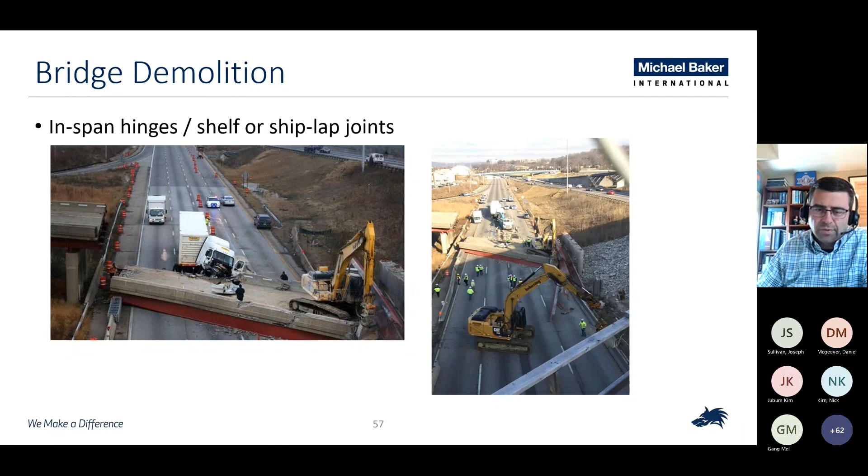What happened there? Well, here's a pretty graphic showing it. The deck was removed from that end span. You kind of lost some counterbalance behavior, we'll say, from that load in that end span, and we put a lot of load out in that center span, and it just put too much load. There's no force in that end span resisting all that weight out in the center span because of those shelf joints, those shiplap joints.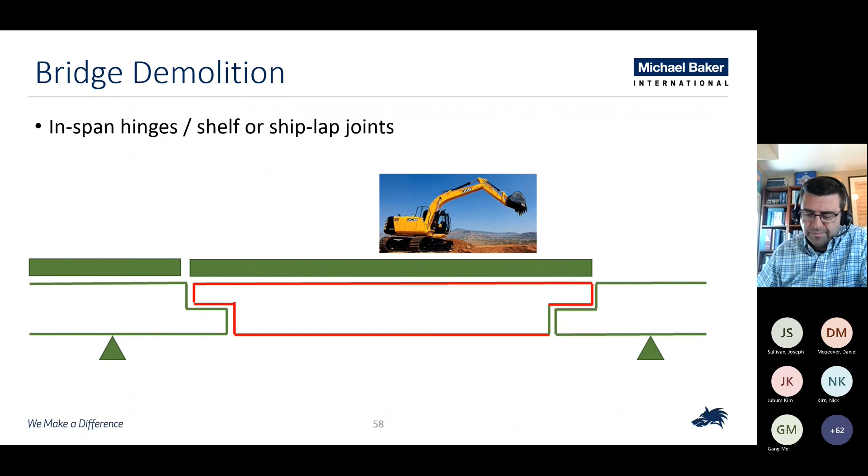We had bearings there between the girders, which really just caused an uplift condition over on the end - too much uplift that couldn't be restrained by the deck that was there. So in some cases, demolition can be just as important as steel construction, and needs to be given its due consideration by a contractor and the contractor's engineer.

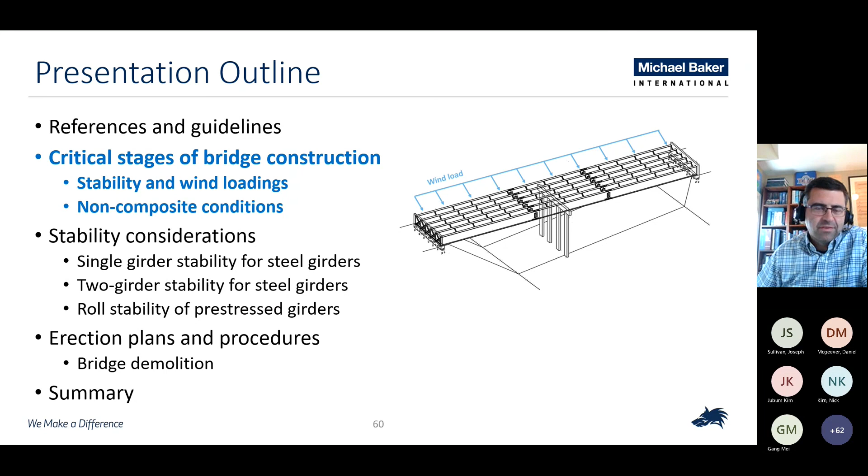So that kind of summarizes what I want to share today. Again, it's a 30,000 foot overview. We spent some time talking about critical stages of bridge construction, really hammered away on stability and wind loadings during construction, and the non-composite conditions that are not the same as our final design bridge. We talked about stability considerations, maybe opened your eyes to 2 girder or even 3 girder stability during deck construction - some issues we really need to consider with steel construction. In some cases, with long narrow systems without any deck, you may want to consider that as well. We also talked about how pre-stressed girders have roll stability concerns we need to consider before the deck is placed.

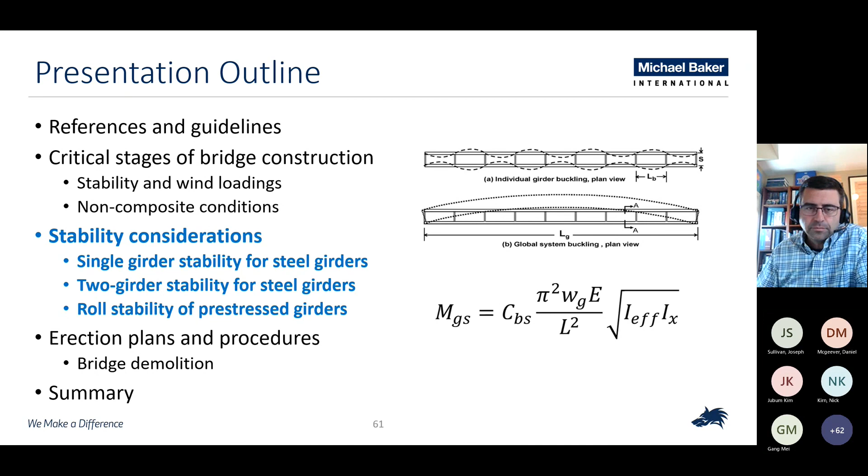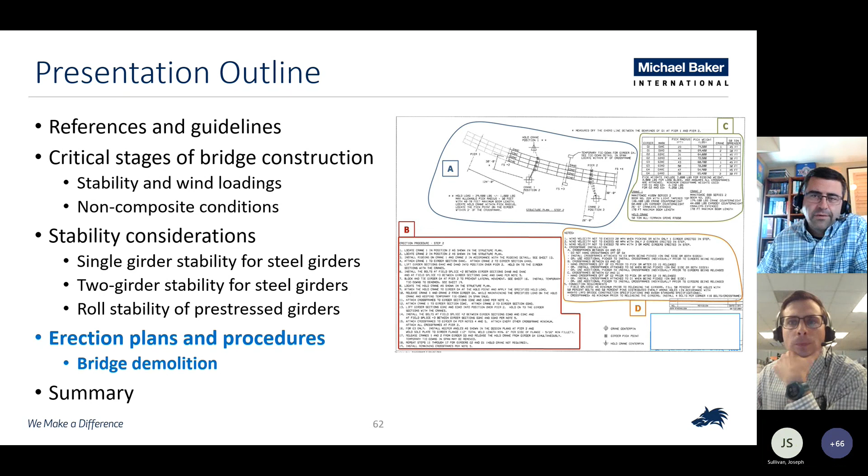Spent some time with the erection plans and procedures, talked about things to look for as a review engineer, or as a design engineer, that you want to consider as well. Really, I can't stress these enough - if you're doing work for a contractor, or reviewing work by a contractor's engineer, these are 3 really important documents you want to have at your disposal. And I'll put in one last plug: NHI has a really great course for this. If you're interested, check out the NHI website, see when it's offered. Maybe start thinking about getting a group to sign up for it, get enough folks there.

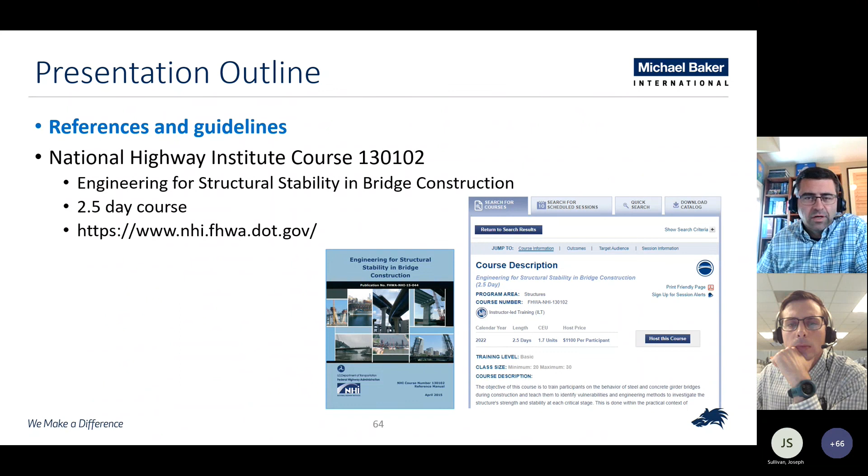So I really appreciate the time here today. I'm happy to answer any questions, or attempt to answer any questions folks may have. Again, really appreciative of your time here today, being able to talk about this issue, talk about some construction issues during bridge erection. Well Jack, I'll turn it back over to you.

Thank you, Brandon, I appreciate it. So if anybody has any questions, please drop it in the chat. I had a question just off the cuff when we were looking at the bridge demo recommendations - are they included in any of the references that you mentioned here?

Yeah, very lightly. In the NHI course we talk about it a little bit, so there's some information there - more so with regard to taking the deck off a continuous span unit, and not necessarily the hinges, when you have hinges and stuff like that. But yeah, it's kind of the reverse construction, right? So there's some good information in the NHI course. I think we talk about it even more briefly in the AASHTO NSBA document, and I can't say with regard to any of the pre-stressed concrete, but yeah - it's not talked about a whole bunch. And I believe there's an ASCE group led by a gentleman from Genesis Structures who does a lot of that work, and I think they may be developing something soon for bridge demolition considerations.